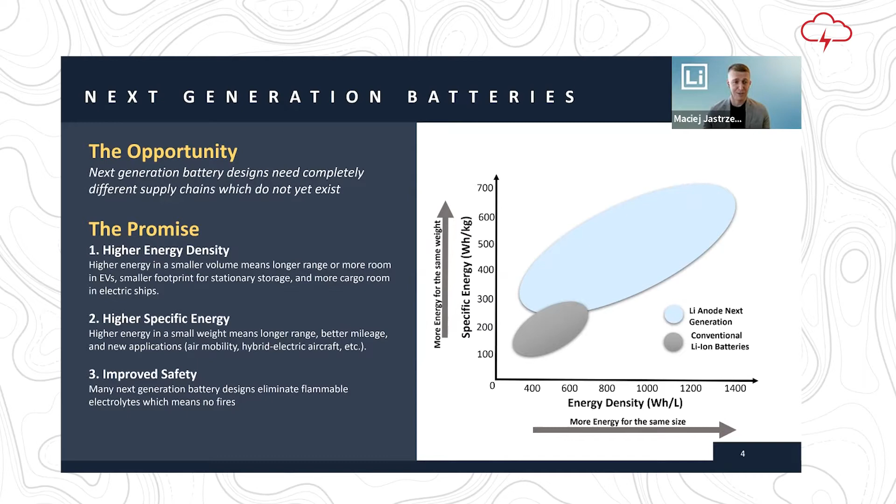If even the top three, let's say, next generation battery companies realize their plans for production, the next generation battery industry in 2028 would look very much like the lithium ion battery industry did in 2020 in terms of size, and growing rapidly thereafter, starting to make up a bigger and bigger chunk of the overall lithium ion battery production.

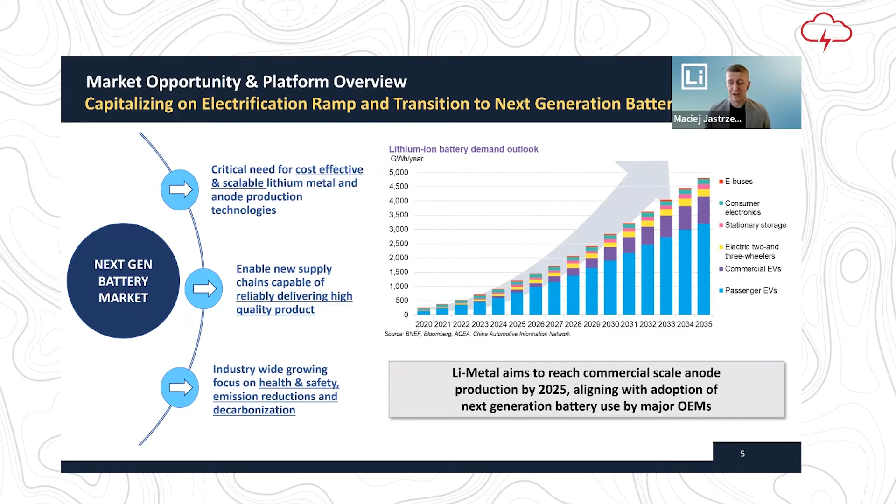So of course we're aligning our goals. Again, it's a big impact on the supply chain. We're aiming to be a big part of that supply chain. And so we're really looking to be in commercial scale production in 2025, which is very much in line with what the major automotive OEMs and battery developers are projecting.

What is it exactly that we're doing? We're addressing two critical problems in the next generation battery industry, or we're removing two key obstacles. And I'll talk about them in turn and give a bit more detail. But essentially, the way lithium metal, which is arguably the holy grail of anode materials, gets into next generation batteries is as a metallic lithium foil.

The process for producing a metallic lithium foil is in many ways similar to the process that's used for producing the aluminum foil that you may find in your kitchen drawer. The problem is that lithium is a much more difficult material to work with. So in order to produce a foil, you end up making it thicker than you would want, and you tend to make it narrower than you would want, and both of those things have negative impacts.

One on the cost, in terms of the scalability of the production process, the amount of material that's used, and ultimately downstream how it's incorporated into the battery. Ideally, you want things to be all the same width so you can laminate them in parallel, which you can't do if one component's a lot narrower than the others. In terms of performance, if you're using more material than you want, you're clawing back some of those performance gains. And of course, more lithium means more active material, excess lithium in the battery, which has a negative impact on safety.

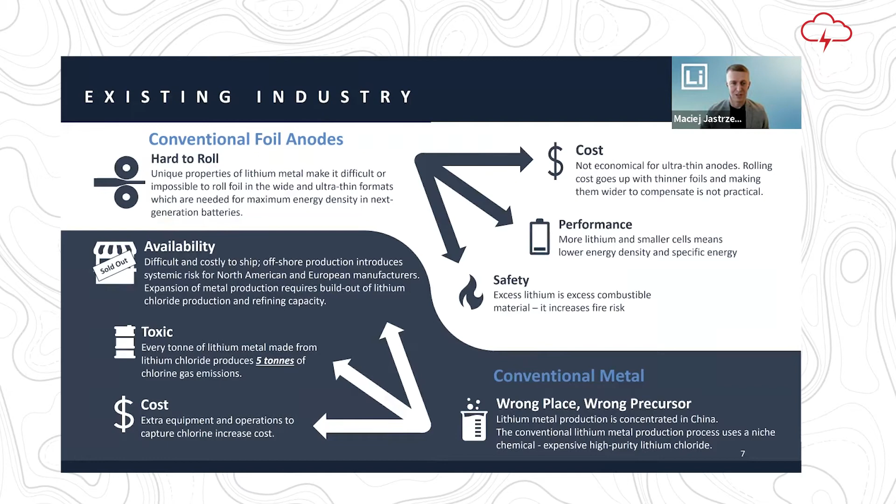So the way we're addressing the anode issue is by completely changing the process for the production of anodes. So rather than taking a hunk of lithium metal and squishing it down into a foil precursor and rolling it down, what we're doing is we're starting with the current collector, which is a component that already goes into the battery, and we're depositing lithium metal onto its surface. That allows us to deposit an arbitrary thickness of material. Because we're doing it on the substrate, we're no longer relying on the mechanical properties of lithium metal, so we can make it arbitrarily wide to match the width of whatever battery production process, or whatever is optimal for the battery production process.

Because we're doing all our deposition in a vacuum environment, we really control the level of contamination or anything else that can get onto the lithium, which improves its performance. And also, we're actually able to do things to that material that you can't do with lithium foil. So there's a lot of upgradability and a lot of customizability that's inherent in the process. We're relying on a physical principle that's been used in the packaging industry. So it's a technology that's more adapted than it is completely new, and so we can be very confident in the scalability, because it's already understood from other industries that have used sort of similar technologies.

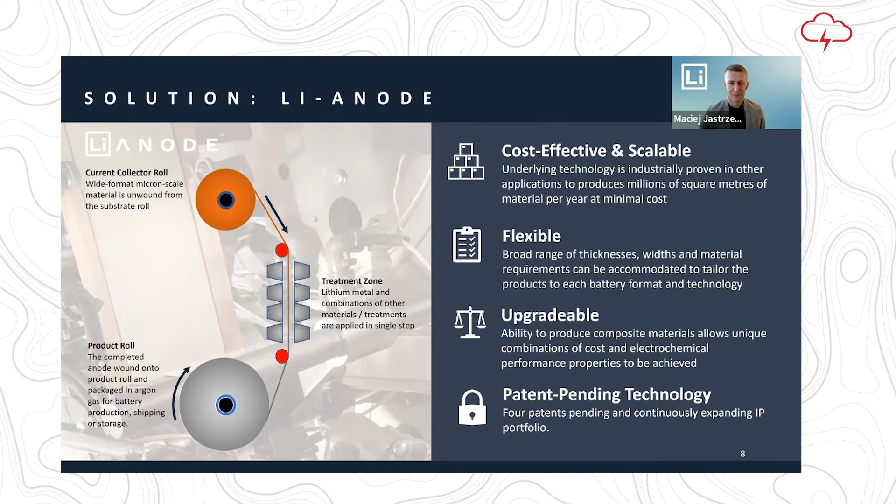Moving to the metal side, the process we're using is in a way fundamentally different from what's currently used to produce lithium metal. It's still an electrowinning process, so in some ways, in principle, similar, but the precursor is completely different, and that forces entirely different equipment requirements and so forth. So we've developed our own custom equipment for the production of lithium metal. What using lithium carbonate allows us to do is it basically permits us to bolt on the existing lithium-ion battery upstream supply chain that normally produces lithium salts for lithium-ion batteries, and we can actually use that to produce the metal needed for next generation batteries.

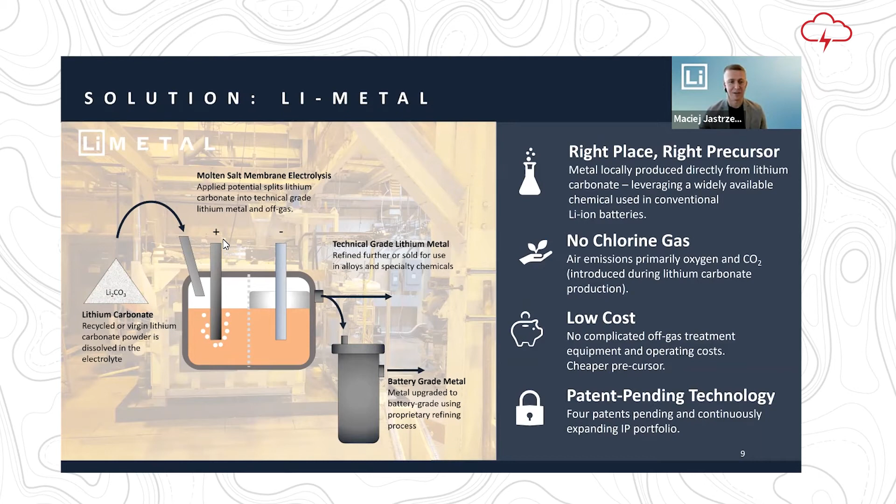By switching that precursor material to lithium carbonate, that eliminates the production of chlorine gas from the process, and so we can eliminate a whole bunch of equipment, a whole bunch of OpEx that's associated with capturing and cleaning those materials. And of course, again, that has an impact on cost, so we expect this process to be more economical. In terms of our strategy, we have a very robust strategy for getting to commercial production. The overall concept is basically to really entrench the technology, to entrench our anode materials in the emerging players' technologies.

So we're working with a lot of next generation battery companies, and so most of the work that we've done over the last year and a half has been to build out pilot production capacity for metallic lithium anode materials that is now operational. And so we're able to supply those materials. We're able to ship product today.

As we look forward to 2023, the next step is to build a commercial scale demonstration plant. That's now sort of a one-off of a multi-machine line, where the machine itself produces close to gigawatt scale, and to build a gigafactory, you would simply use more of those machines. So once we're at that step, scaling again is relatively straightforward. So we're looking to do that next year, and then getting to gigawatt scale in the 2025 timeframe.

Supporting this, we're also aiming to localize lithium metal production, again through our cleaner and more cost-effective process, so that we can be a reliable local supplier of these materials, primarily to the automotive industry.

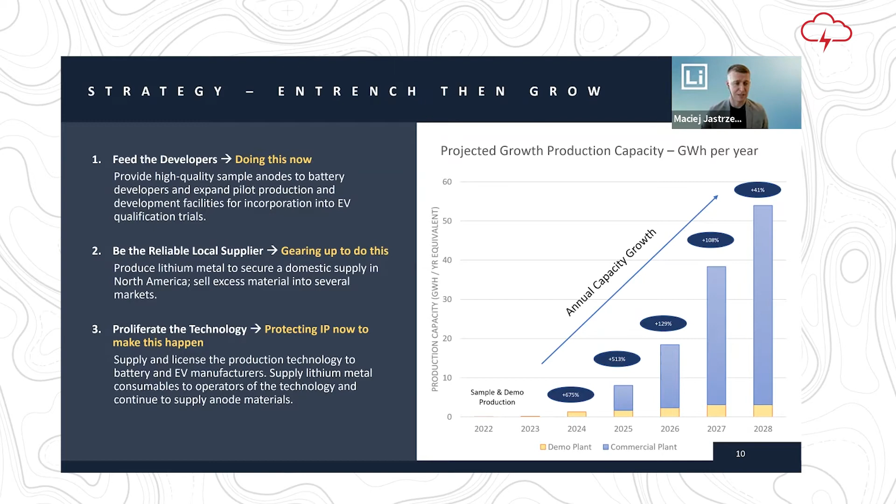Just talking to some of the things we've been able to achieve in 2021 and 2022. We are now listed on the CSE under ticker symbol LIM. We've completed the build out of the Rochester pilot scale anode production facility that allows us to supply material to battery developers in the United States. Very exciting, and this was announced only a couple of days ago: we've signed a joint development and commercialization agreement with Blue Solutions. I'll talk about that in a bit more detail on the next slide.

But the big goals for the rest of the year really are to complete the expansion of our Toronto facility, where we'll be piloting the lithium metal production process, and to run those piloting activities, to really demonstrate that it can work properly and achieve the performance metrics at an industrially relevant scale.

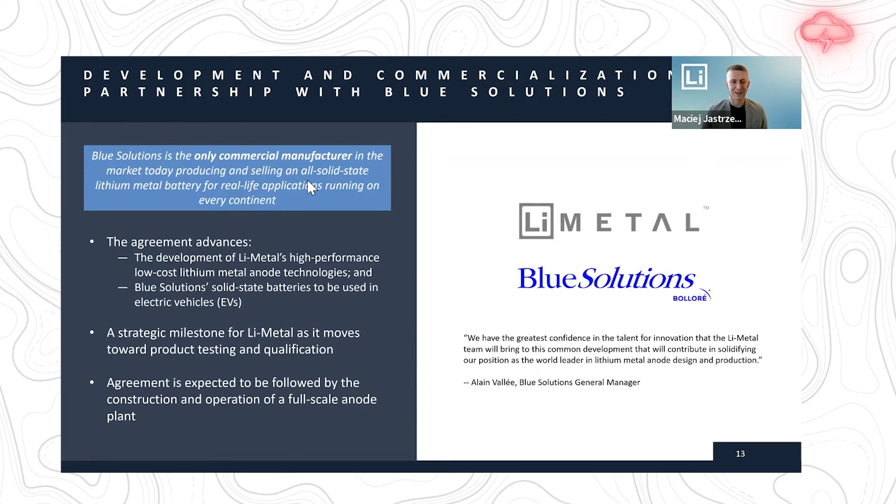I'll just speak to the facilities a little bit, because we do have two facilities. Rochester is a smaller facility, but it's where we have our anode production plant. This is a plant that's capable of producing thousands of meters of anode material. So it's sort of a dual use facility. On the one hand, we're producing sample material, and on the other hand, we're running industrialization trials on second generation products and so forth. So it's a mixed use development and sampling facility.

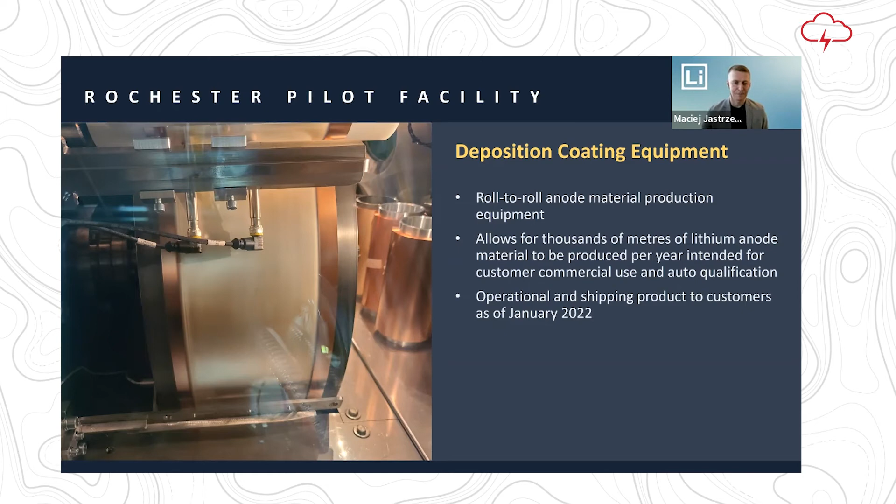In the Toronto facility, we actually have two areas other than it being our headquarters. At the end of last year, we completed commissioning of our advanced anode materials development lab. This is a really flexible facility. It allows us to work on materials beyond our initial product offering that will allow us to deliver better electrochemical performance, potentially better cost performance. And so this is going to work in tandem with the pilot facility to bring those to fruition.

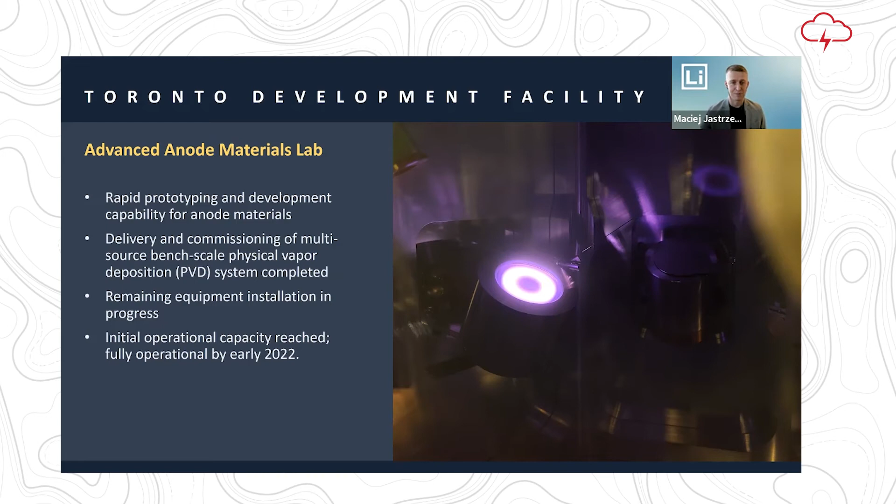I've already noted this, but the whole facility is a 14,000 square foot facility. The main process area will really be where we're going to build out our lithium metal production pilot line. This is actually an old photo now. We've got quite a bit more equipment installed there, and we're expecting that to be online, with initial operational capability towards the end of the first quarter of this year. So basically very shortly.

With the follow-on sort of piloting campaigns running throughout the year.

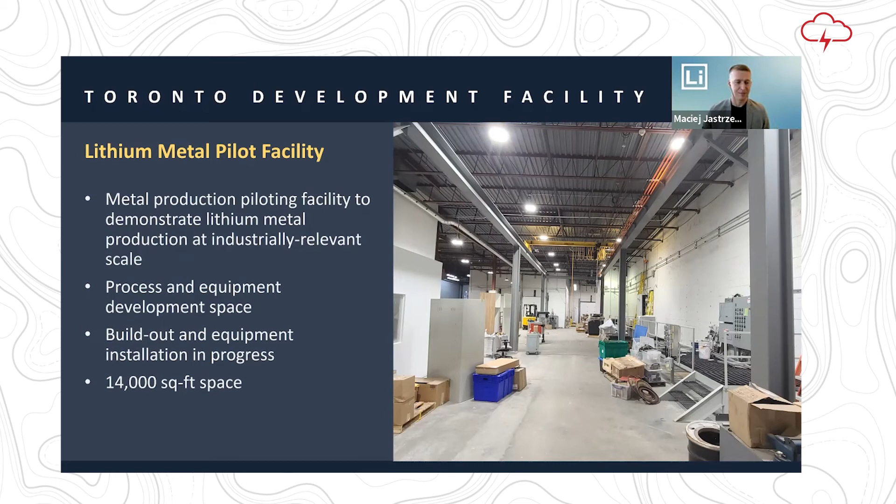We do have a question or two. What agreements do you have, or I guess sometimes it's proprietary, but what kind of agreements do you have in place with both suppliers and customers? So we've just announced that agreement with Blue Solutions. That's the only one that's been disclosed publicly. And so, yeah, that's the only one I can really talk about at this stage.

Okay, great. And obviously, with the work that you've done to date, that's an area of potential growth as you build your customer base. And absolutely. And I guess looking at the supply side, is there any risk to supply of lithium for your products, given kind of the competitive marketplace out there? Yeah, look, I think it's certainly an area that we're working on.

I think the key differentiator for us relative to another company trying to do something like this is that because we can use lithium carbonate, there's actually a much broader marketplace of materials, a much broader list of potential suppliers for what we're doing, whether that's virgin material or recycled material. We can use that in our process, whereas a conventional lithium metal producer would need to source or produce themselves high purity lithium chloride. So I think we're at a big advantage there.